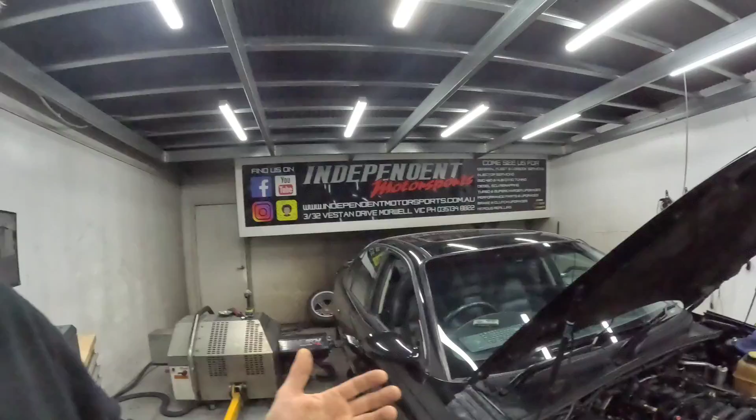So I thought, let's grab Mark's Commodore. He's our office guy, parts sales guy, the guy you normally talk to over the phone. Let's just get the camshaft, whack it in, have a go and see what it does.

Let's do a back-to-back test. We're on the hub dyno - you don't get any better when it comes to repeatability. This has already had another camshaft from another brand in there. This video has got nothing to do with saying BTR's better than this brand or that brand's better. The whole purpose is to show you guys how the Truck Norris compares - how does it work, how does it perform?

I'm not anticipating it's going to make much power on the top end, but according to BTR himself, it's going to make a lot more torque in the bottom. So how do you find this information out? Well, you test, and that's how we learn what we learn.

I thought I'd go one step better. I reached out to the team at BTR and said I want to test two camshafts. They've just recently released a new Stage 1 LS1, LS2 grind, and that's at one opposite end of the scale compared to the Truck Norris. I thought, if we're going to do some camshaft testing, let's test them both - a back-to-back test on the Truck Norris, which is primarily known as a low-down torque camshaft and a choppy camshaft apparently, against their other camshaft, which is at the other end of the scale.

According to BTR, they say the Stage 1 isn't too angry, and I'm not sure, because looking at the camshaft specs, it's a lot bigger than what we would normally use. It's a lot of lift, so I'm like, wow, how can this cam be tame? It just doesn't look like a tame camshaft. So we're going to try it out.

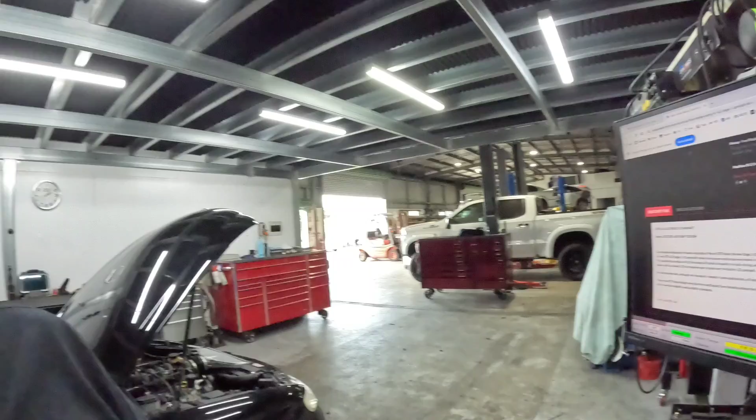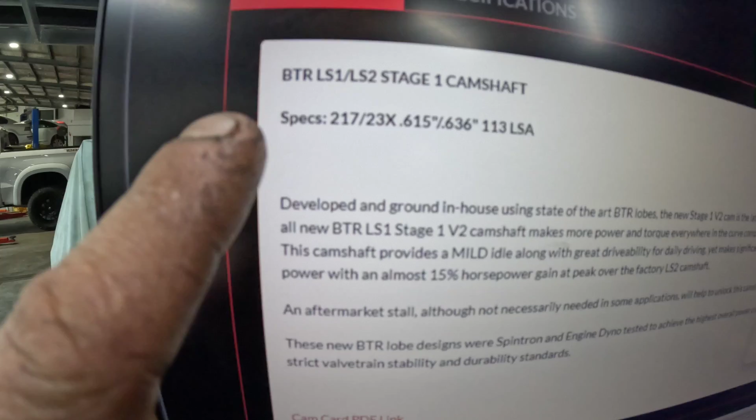So this is your Truck Norris, which is a 212, 222X, 550 lift, 107 lobe separation. And the new Stage 1 LS1, LS2 camshaft is a 217, 230X, 615 lift, 636, 113 LSA.

Much bigger camshaft, so two very different ends of the scale. But I guess the big thing is what are the differences? What did we see between the two of them, and let's go and explain it.

I just want to note that the camshaft we had in this car has always been our go-to camshaft for a long time, and I still will recommend it based on different applications. So I'm not knocking this camshaft in any way. It's from our supplier that we've used for many years, and it's always nice to show new tech, comparisons against other products. It's how we better ourselves, it's how we know what's better and not so much better. Let's not go and bag on any companies here, let's keep it clean, and focus on the whole purpose of the video, which is to demonstrate the differences between the two camshafts. Let's just go with it.

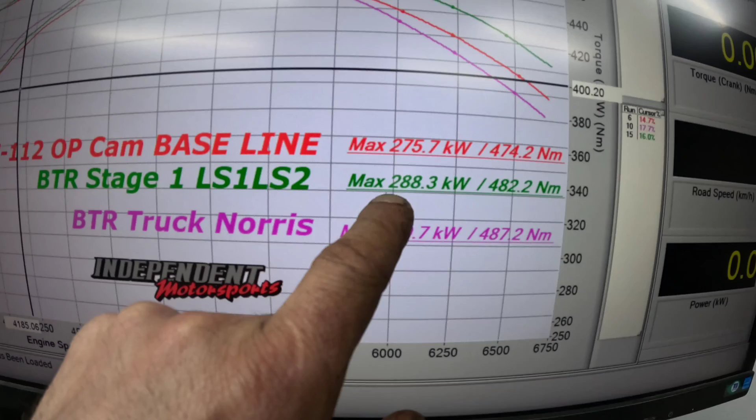As you can see, the Truck Norris made 269 kilowatts, 487 Newton meters. The Stage 1 camshaft made 288 kilowatts, 482 Newton meters. And the previous cam that was in it was 275 kilowatts, 474 Newton meters.

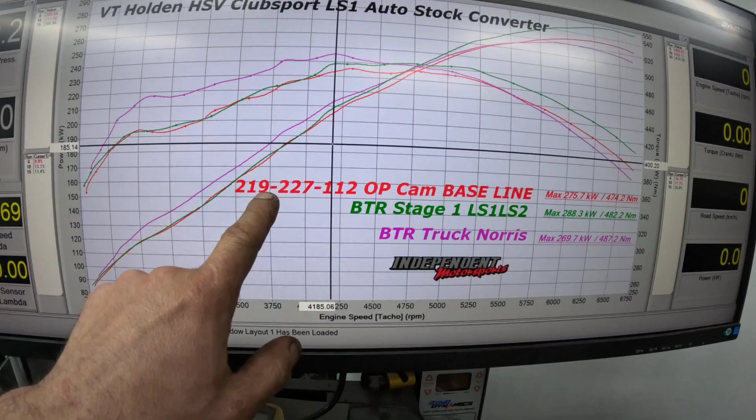Now these are peak power numbers, which I don't really care about too much. So the camshaft that was in the car previously, it's an LS1, automatic transmission, standard stall converter, running a 219, 227 on a 112, and around 600 thou lift. But the big thing is, let's check it out.

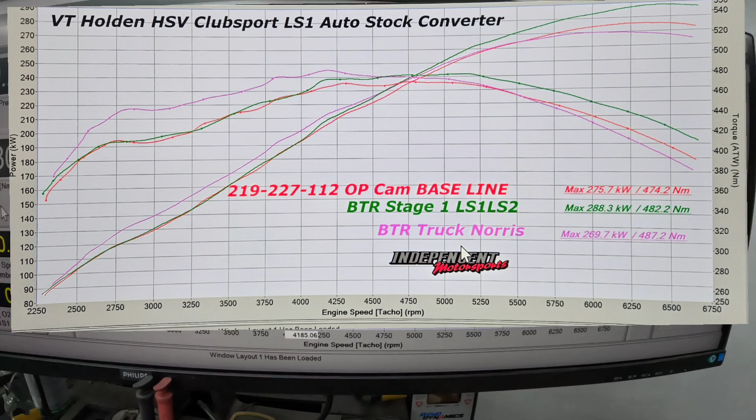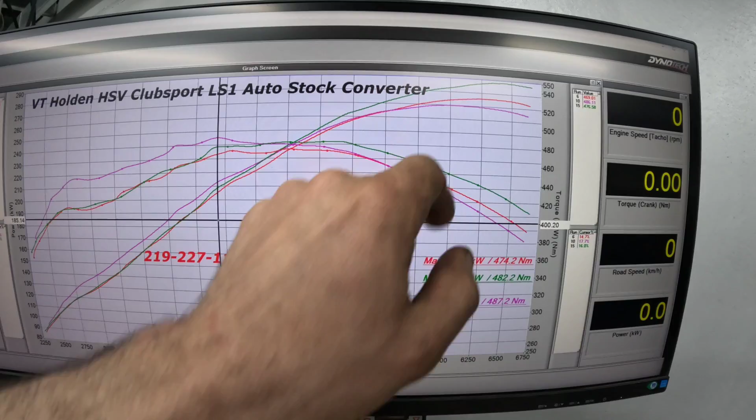So the red line is our standard camshaft, then our purple line is the Truck Norris, and the green line is the BTR Stage 1. Now you can see from around 5,500 revs, the Truck Norris does start to fall over compared to the slightly bigger cam that was in it.

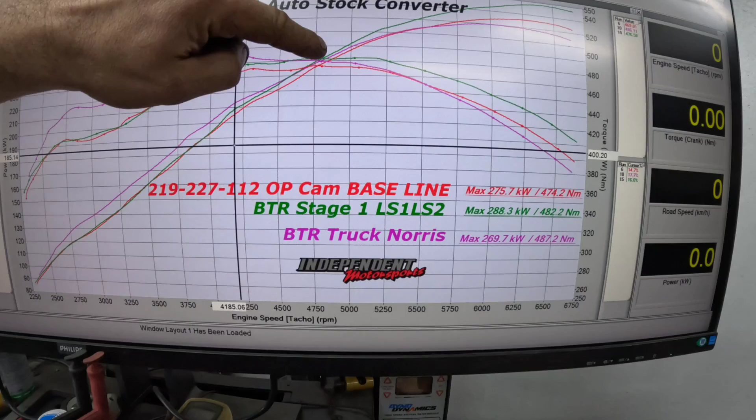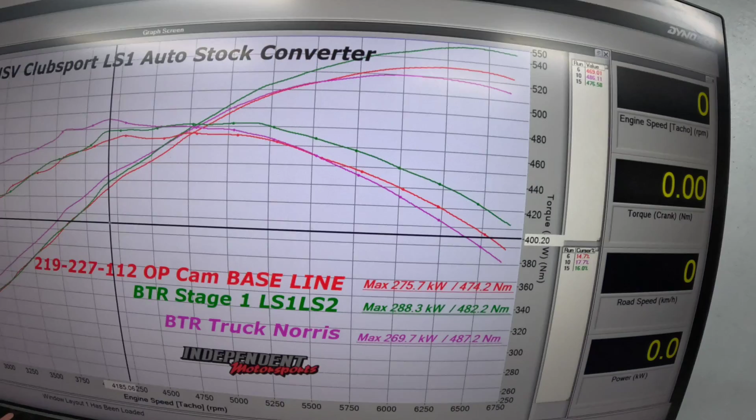However, the Stage 1 camshaft from 5,000 revs starts to tower over the top of both of them. Now that's expected, it's a much bigger camshaft, so I do expect it to make more power on the top end. And Brian Tooley actually said it would make around 20 odd horsepower more than the Truck Norris, and he was pretty much smack on the money.

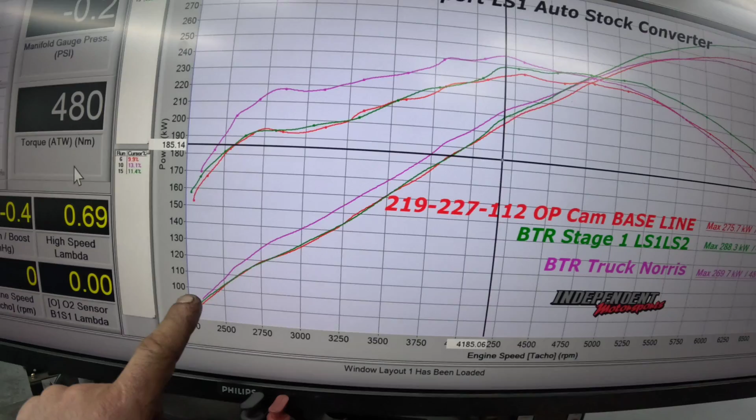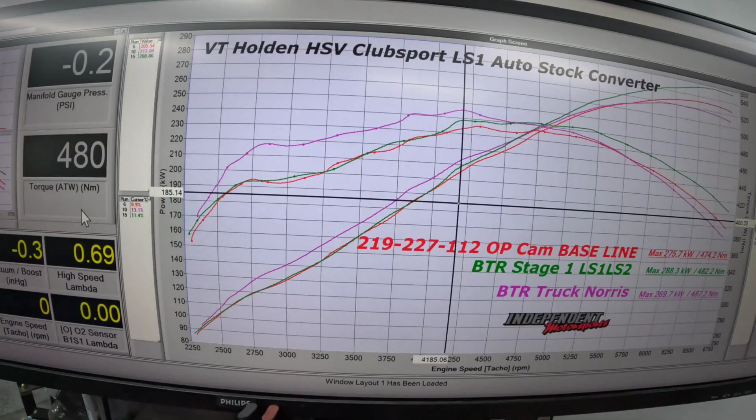But the thing that impresses me the most, and this is where you work out what way you're going to go, look at the Truck Norris off the bottom. From pretty much 2,200 revs all the way to 4,500 revs, it's about 10 kilowatts up on the bottom. Now that's impressive. However, it's 40 Newton meters up off the bottom up to about 4,000 revs. That's going to make this car feel a lot faster than the bigger camshaft. And the reason why is obviously you're making more torque off the bottom.

So if you're a driver who likes to drive his car, pull up next to a set of mates, and accelerate, hit the throttle, you got more torque off the bottom, it's going to feel faster. If you take off into the traffic lights, or as a roll on and so on, it's going to feel faster. If you've got a conversion car, say a four-wheel drive with an LS1 engine, and you want low down torque, well, the Truck Norris, it's a winner. It's a clear, absolute winner.

It's a good cam. I'm surprised, and it sounds amazing. The chop on it is better than any other bigger cams that we've put in other cars. So it gets an absolute big tick from me. And the best part is it's a minimal lift. It's a small camshaft. You can put a smaller beehive spring in it. You can back off all the gear that you normally would traditionally run. You don't have to overcook the whole build and save some money, which is a great thing.

However, if you're the sort of person who wants to mat it basically and run it all the way to rev limiter, or you're racing it, or you're one of those drivers who just loves to rev their engine - we all do, that's why we do what we do, we want to flog our engines. Let's be realistic, you know what I mean? We didn't do this to just putt around. Like most people, some people want to putt around, but the average person wants to put the boot into it. So if you're a person who loves to go metal to the metal, flatten it, just send it, the Stage 1 cam, mate, that's for you.

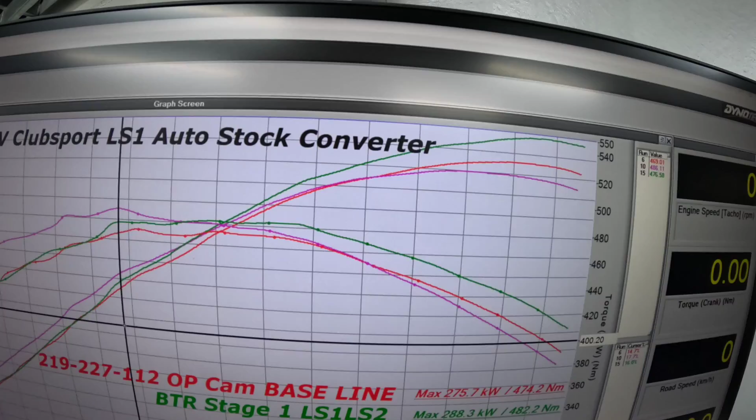It's got a nice sound. It sounds cammed, you know, it's camshaft, and it's got a mild sort of lope to it. It's lopey, don't get me wrong, but it's mild. The Truck Norris, mate, you couldn't have picked a better name. It is choppy as, it chops good.

For me, I think the average person with an LS1 in an auto who doesn't want to put a converter in, I think this Truck Norris cam is going to be the best cam you could physically put in that car. But if you're a person who wants to rev it, Stage 1 cam, that's for you. So what end of the scale are you on? Are you the person who wants to put the boot into it but get off it after 4,500 revs?

Truck Norris, it's a no-brainer. If you want to go from 5,000 revs and up, Stage 1. Up to you, not one is better than the other. They are both better than each other based on the application or how you drive the car. So it comes down to your personal choice, personal preference, and so on. It's always good to talk to your tuner, your builder, and work out exactly what you want in there, and that's the deciding factor.

I hope you enjoyed this video, because it was a real eye-opener, the difference between them. I wasn't trying to discredit the previous company who'd done the camshaft. They've always done great work for us, and we've still got the cams on the shelf. But it's always nice to open your eyes up to new products out there.

I've heard a lot of talk about the Truck Norris, and I've seen the Stage 1 come out recently, and it caught my attention. I thought that might be a pretty good cam to test out. A lot of you guys who follow us on YouTube were requesting that we tried out the Truck Norris, and I'm absolutely stoked that I did now.

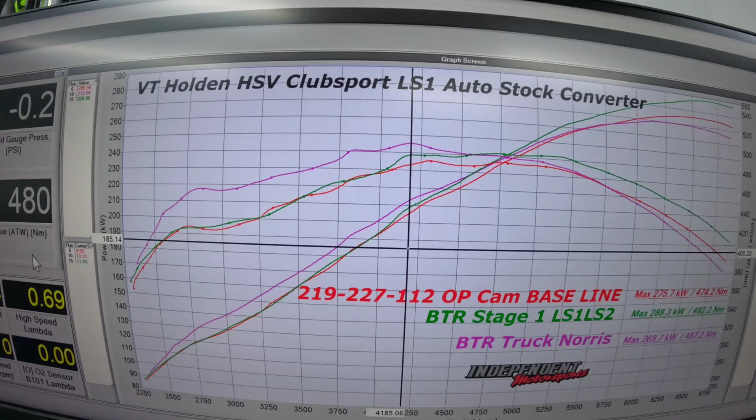I should note that this test was all done today. We had the camshaft ready to pull apart in the morning, and we've pretty much swapped the cams out over the course of the day and done the test. I'm absolutely stoked with the results, and I don't think anyone would be disappointed whether you went with a Stage 1 or a Truck Norris. But it's a clear winner in my eyes.

I've got the sound clip with both cams. I hope the video shows it, how I could hear it. Audio can always be a bit of an issue trying to get it right, but hopefully you guys get the gist of the differences between the sound, and you can make your own decision on what you think is the best one.

But man, Truck Norris, it gets a vote from me. I'm very, very impressed with it. But if I'm going to do track days, Stage 1 cam, that's where I want to go. Or if you're going to really get up it, that's the way to go.